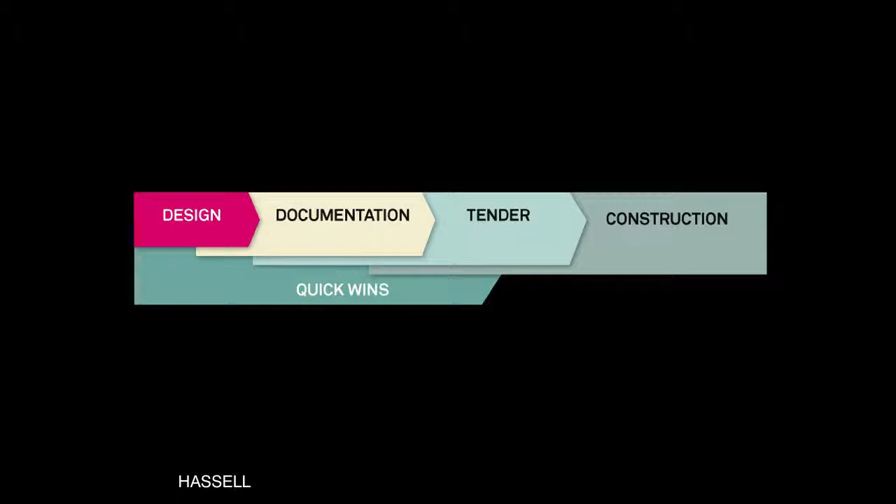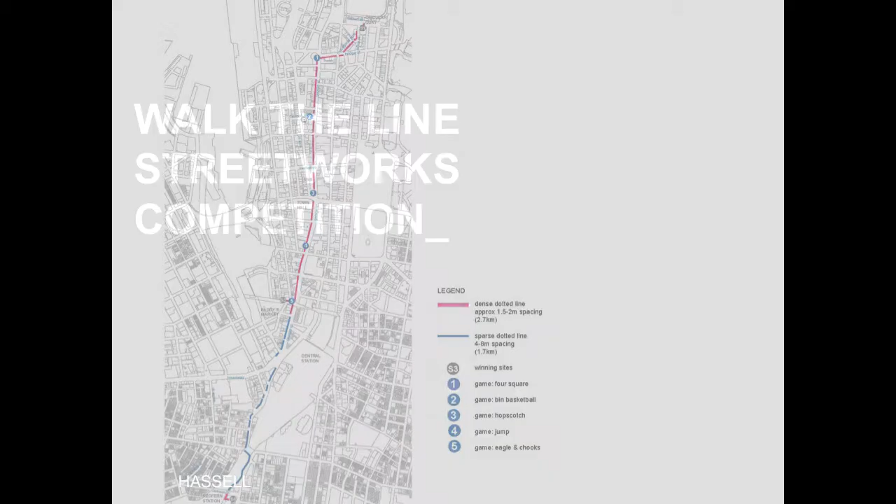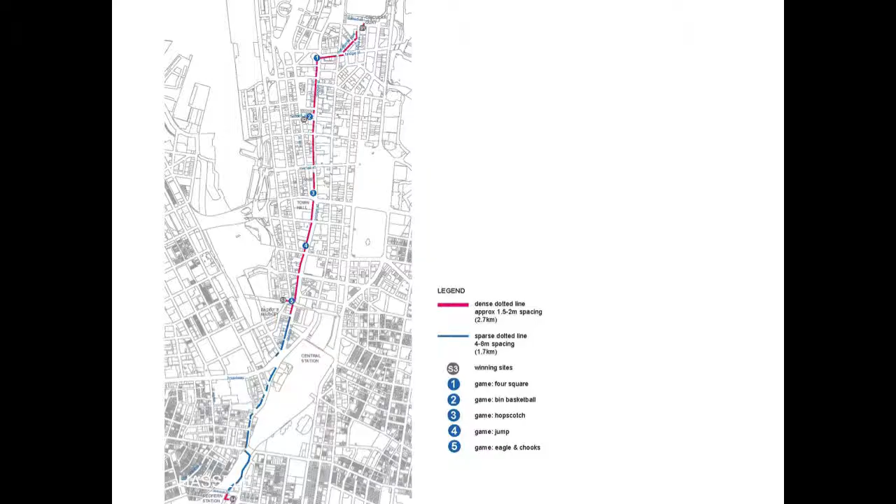One of the projects that falls into this temporary category is the Walk the Line Streetworks competition that we participated in and won last year. The idea of this project was simply to link, it was run by the New South Wales chapter of AILA, and they presented 5 different sites, and you could insert a temporary use or a temporary proposal in the project in any of the sites. What we did was link all 5 sites, basically with very little material, very small intervention. It was basically a pathway marked by a series of pink dots, but it was punctuated at each of the sites with opportunities for play, going back to the idea of what used to happen in streets.

And of course we're talking about city streets here, very different to a residential community. So it was also a bit of fun, but it was pointed in a way, trying to get people to think about what used to happen on the streets before the age of the iPod. And obviously lots of fun, four square, this, an opportunity to piff your rubbish into the bin from the gold circle. So that was one very, very low intervention project. We basically stuck stickers on the ground and then scraped them up again after the project was over.

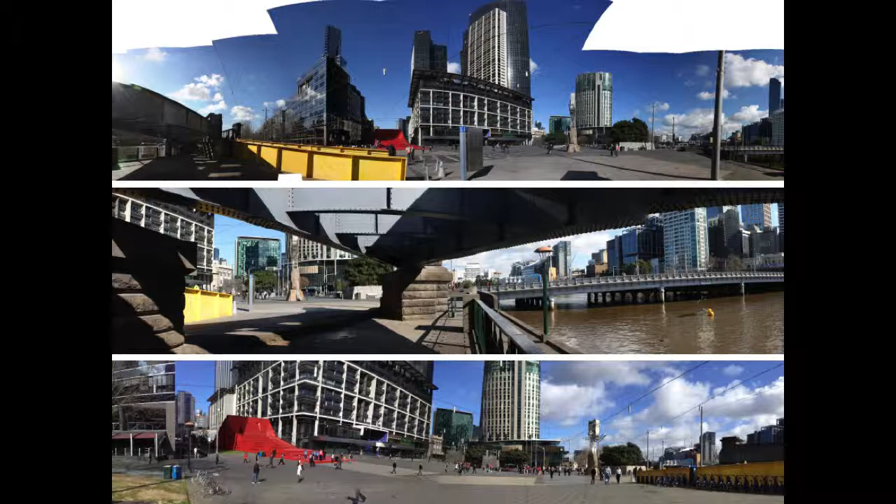We've also recently considered the Urban Coffee Farm as part of the Melbourne Food and Wine Festival. This was a much larger proposition, it went for 17 days. The site is, you can see the little red dot, approximately the middle of the site there - Queensbridge Square in Melbourne, on South Bank Boulevard, just where the Sandridge Bridge hits the square. Although it's called a square, it doesn't really have much of a life of its own. It's kind of ill-defined. It is at the end of that pedestrian link on the bridge, but it's a pretty lifeless square. You can see the yellow handrail coming down off the bridge, and there is a very large kind of lightweight stair structure, the red structure, over a car park entry.

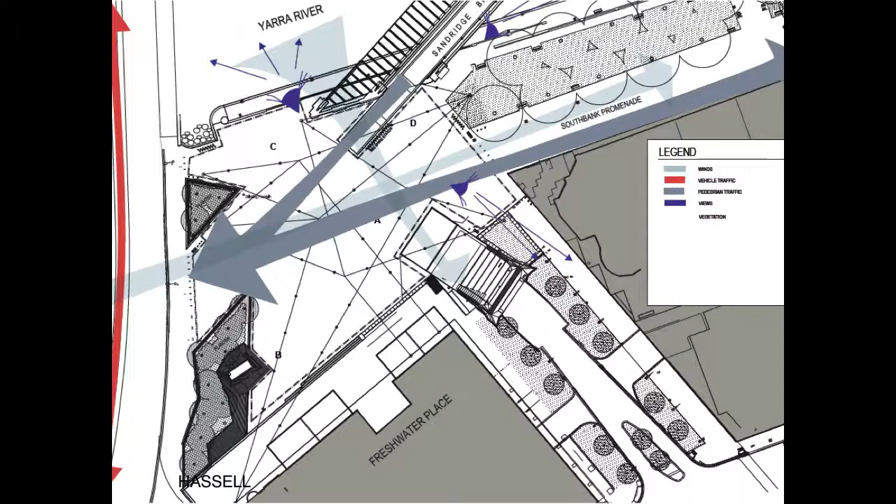The interesting thing about this place is that those grey arrows represent footfall of 50,000 people a day walking through that space, and I'd suggest that very, very few of those people stop. So this was about working with the Melbourne Food and Wine, who had a theme about coffee. They wanted us to come up with a temporary cafe. And we went and spoke with providers of coffee, Ben from Five Senses sources ethically sourced coffee from Guatemala, and we learned a lot about coffee and thought, in fact, that's what this space should be about.

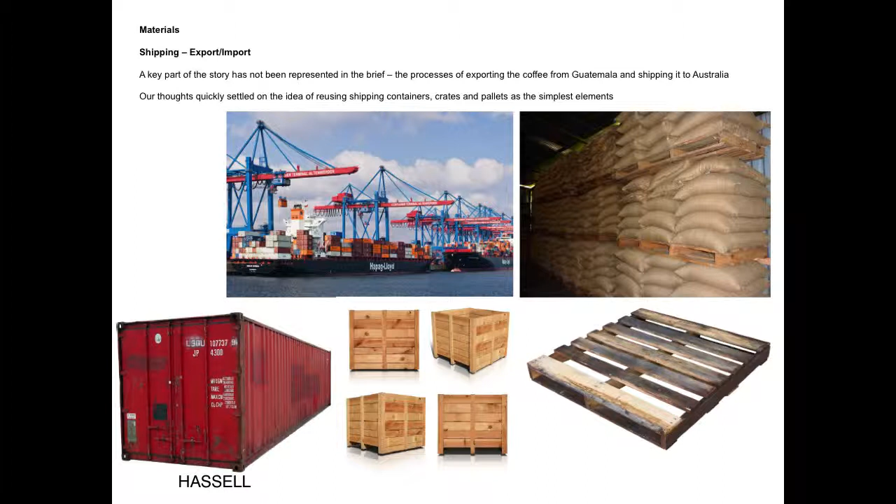So as well as play, we thought that public spaces and street spaces can also be about learning. What we hoped to do via the coffee farm was to help people understand where in fact their coffee comes from. People are really interested in provenance and the food miles involved in producing food. So there was an opportunity to create a farm with an education zone and a tasting area, but also to draw people's attention to the enormous amount of logistics it takes to actually move the beans to Melbourne, roast them, grind them before you get your latte.

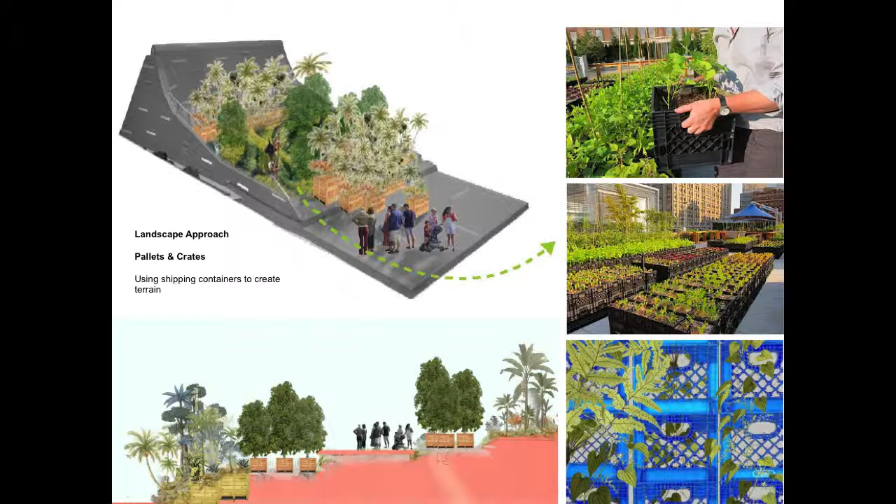The concept of using crates and containers has been done a million times, but for us it was an important way to draw that connection with the logistics. So here's the concept. The idea was about bringing a little bit of the jungle, that still somewhat mysterious place that your coffee comes from, to the city, and using the red stair to evoke the terrain of the terraced coffee farm, bringing it to Melbourne, so you can see literally the connection we're making. And we talked about the image on the right being a takeaway jungle.

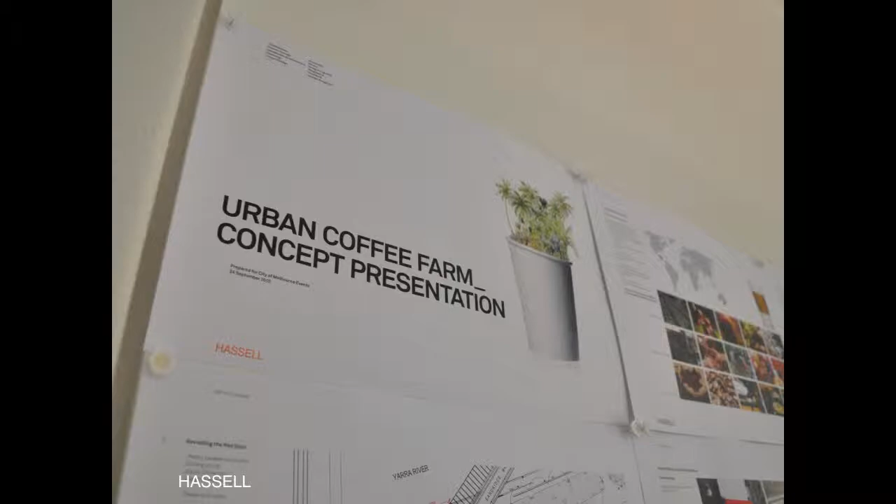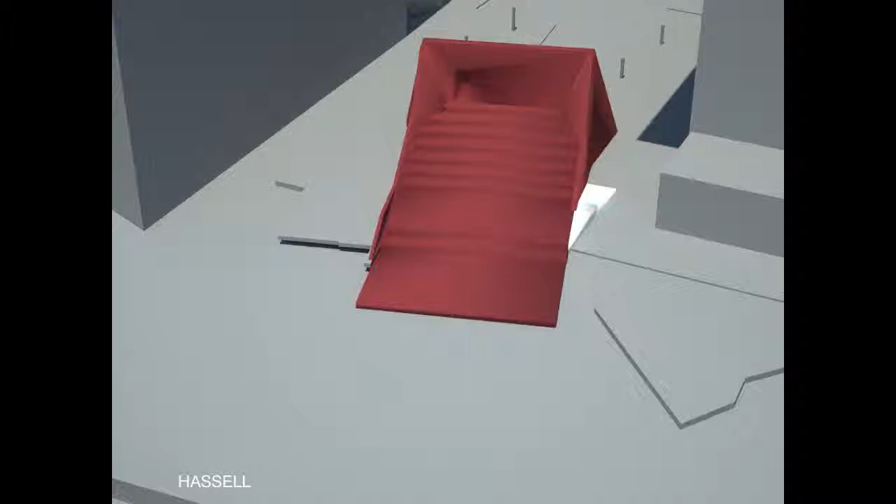Our young designers workshopped a number of ideas and then developed this one that we went forward with, and that was the original concept: how we could use the materials involved in the logistics of moving coffee around the world to actually create a terrain and occupy that red stair. And we went through all the process of sourcing the pallets and building up the concept.

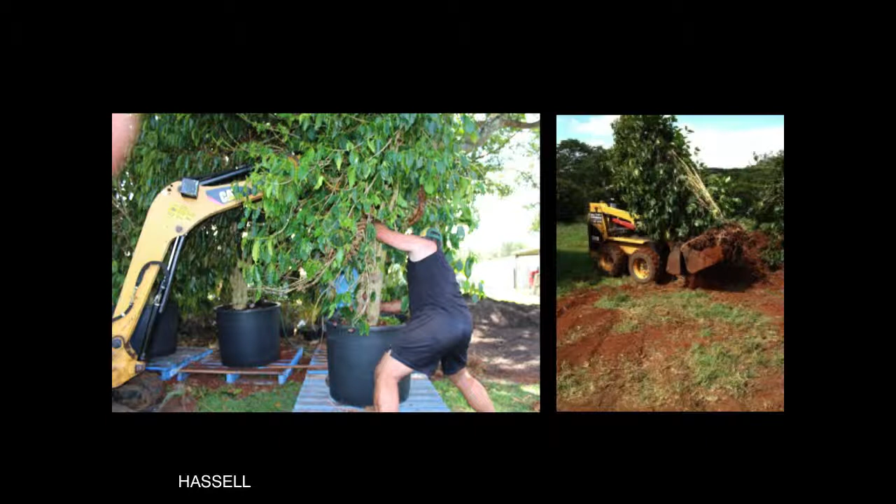We sourced some established coffee trees from a farm in Queensland that had actually gone out of business, and got some contributions from Warner's Nursery and other partners. It was a really successful installation for the duration of the festival. You can see we very cleverly borrowed the landscape of the plane trees behind, and we think we really managed to evoke that. Coffee trees always grow under a protective canopy, and we really wanted to evoke that kind of hillside.

So that space, talking about learning, the space in the back there was usually full of people tasting different coffees, brewed in different ways, roasted in different ways. So it was quite a learning environment. It was a lot of fun. We got a lot of media coverage and a lot of blogging happened from there.

Interestingly, the program over 17 days featured, because it was part of the Melbourne Food and Wine Festival, some fantastic Melbourne cafes and restaurants. We thought this was a really good way of getting the community involved. Projects like this are often criticised, I think, because permanent cafe owners are concerned about trade taken away from them. But this is a way that existing businesses can be showcased.

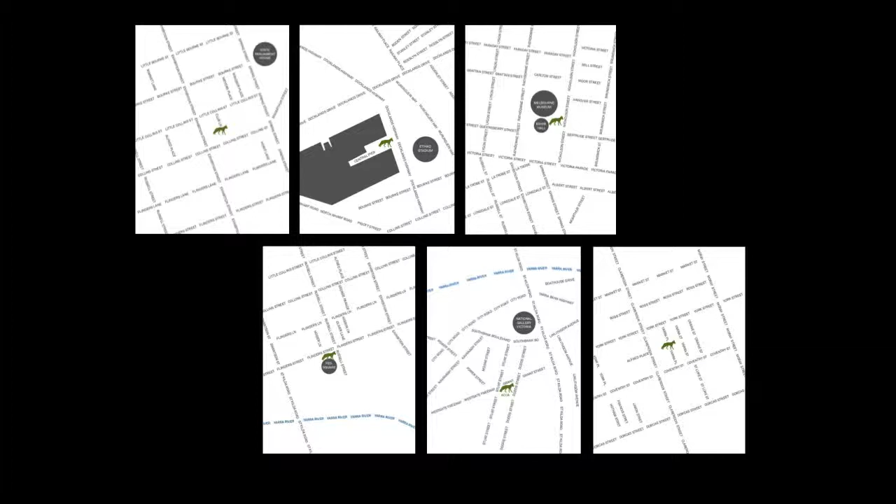Chasing Kitsune was another temporary project that we worked on. Kitsune is a mythical Japanese fox, and no one knows where he's going to be tomorrow, no one knows where he was last night and where he's going to be tomorrow. This project moved around the city, and the only way you could find out where it was is by following on Twitter or Facebook. So you only ever found out a couple of hours beforehand where it was going to be.

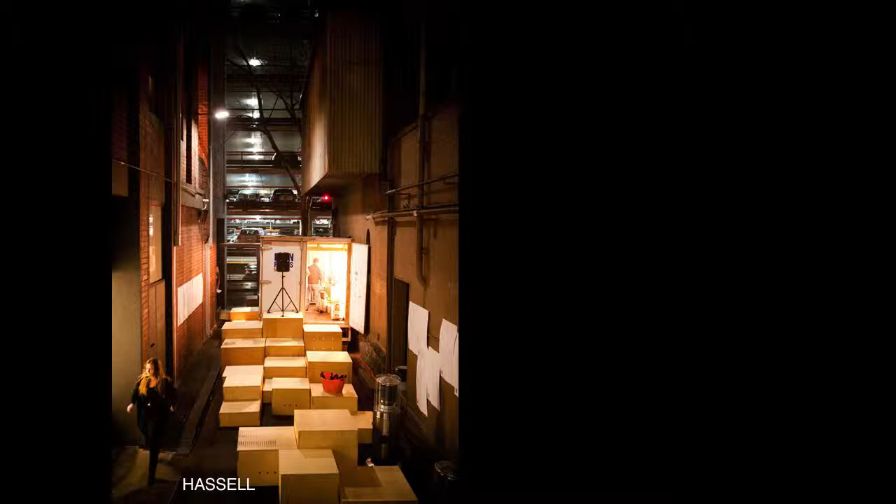The experimental part of this project was this movable landscape that in each different location looked different, because it had to be configured in different ways because of the environment. So that was another really interesting temporary project.

Moving on from the temporary projects to permanent projects. This category talks about multi-mode, and by traditional, as I said before, I'm talking about splitting, not shared streets.

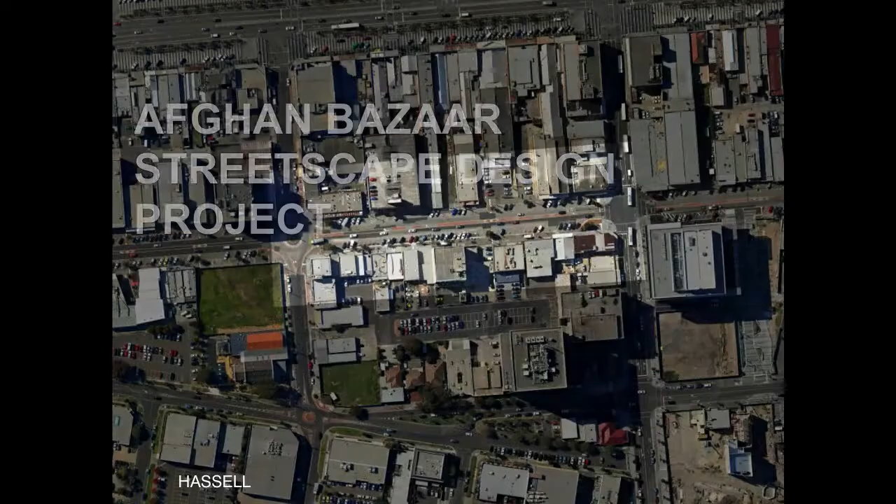The example we're using is the Afghan Bazaar Streetscape Design Project. The project is in Dandenong, an eastern suburb of Melbourne. It's an employment centre, but a centre that's been in decline for quite some time. There's Thomas Street there. Places Victoria ran a project over some years revitalising Dandenong, and there was a lot of good work that came out of that.

Lonsdale Street upgrade and some master plans for various precincts. The idea for the Afghan Bazaar came out of that work. There was some signage done. Thomas Street was identified as the centre of the Afghan community. In fact, I think it's 40% of Victoria's Afghan community, maybe Australia's Afghan community, lives in Dandenong. This LGA certainly represents the highest proportion of Afghani people.

So the first project that came out of Places Victoria's work here was a signage project marking this as the Afghan Bazaar. Unfortunately, they got it wrong because camels were used as symbols on the project. For anyone that knows anything about the Afghan community, the camel is a very clear representation of the Pashtuns, who dominate the other communities or sub-communities, and it was a very, very contentious thing to do. It upset a lot of people.

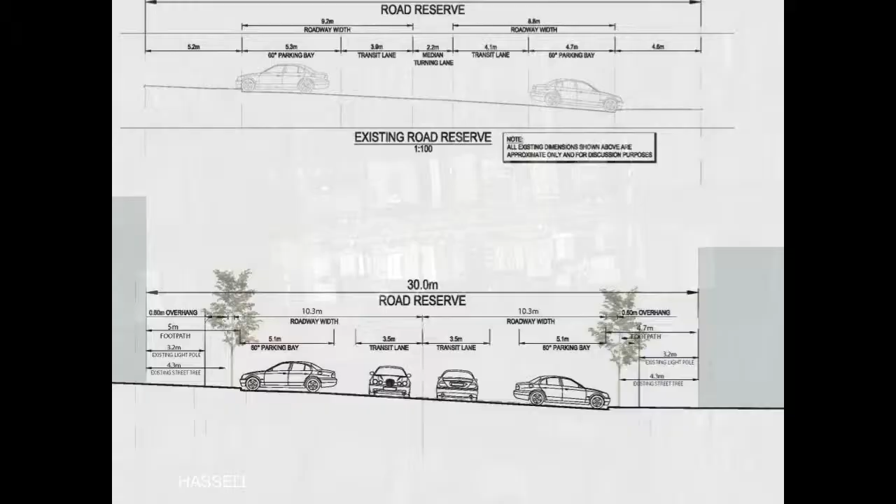You'll see in some of the images what they were. It's just a really simple cross-section through a typical street with footpaths separated from the carriageway with parking zones, and we reduced the number of parking spaces, but I'll go through that.

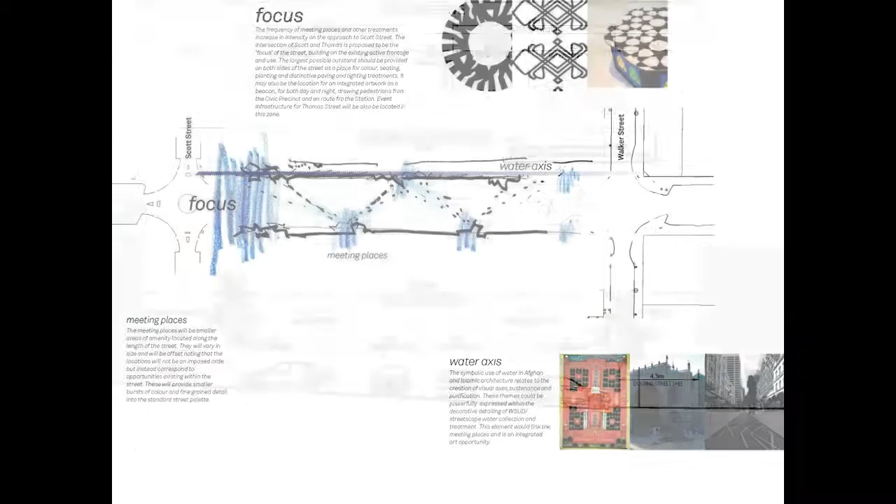So the project provided a focus for the precinct. You can see in the sketch design that was to mark, do what the signage with the camels was trying to do, mark that entry into the precinct, but provide a visual focus.

Thinking about what the subsets of the community had in common, there was a lot of talk about the importance of the blue mosque in Afghanistan, the colour blue itself, red and blue from Afghani rugs, the idea of creating meeting places, and meeting places that were particularly good for large groups, family groups, and after dark.

There's a very large part of community activity in the Afghani community that happens after dark. Family groups go out as an outing and sit in groups in the street. That's how those streets are used in Afghanistan and throughout the Middle East, and that's how the community wanted to keep using it. So we've gone through play and learning, and now we're up to talking about meeting and family groups meeting and occupying the street.

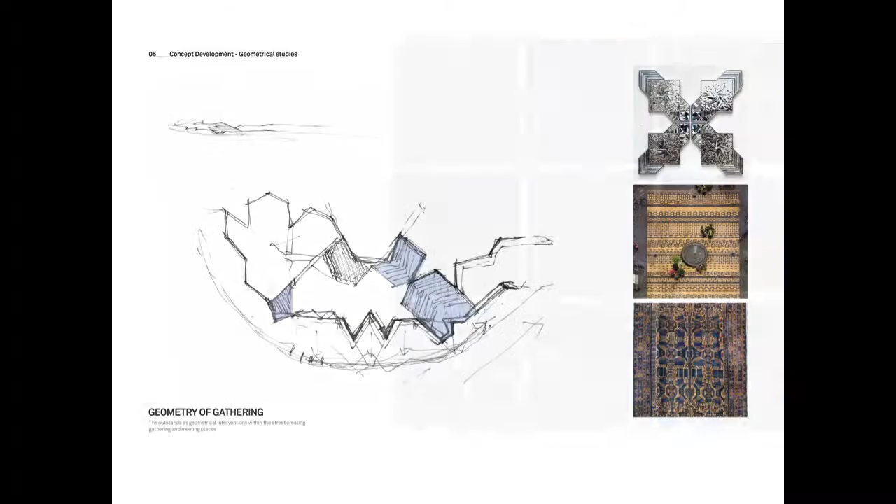Water axis was also a very important component, but we picked that up using blue as a colour theme throughout the project. You can see all sorts of references in the Middle Eastern use of blue. Another consistent theme was in the art, particularly religious motifs, the use of Islamic patterning, which we reinterpreted and reapplied in different ways in the furniture and paving through the project.

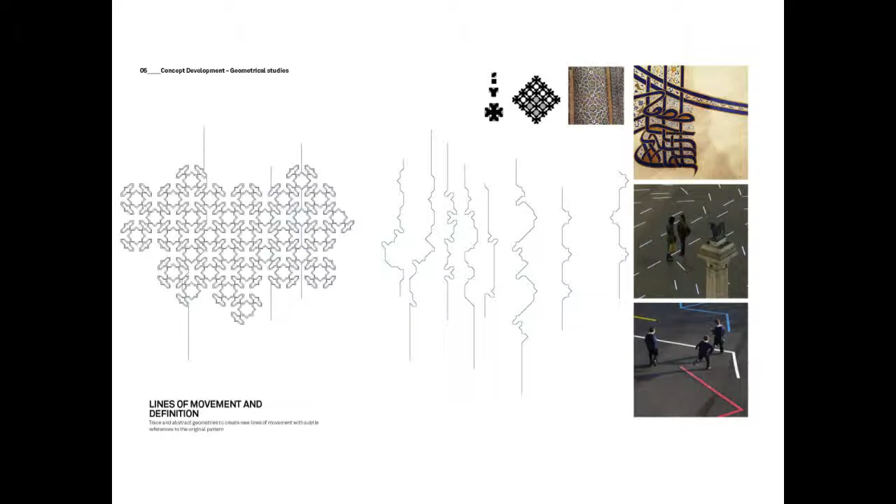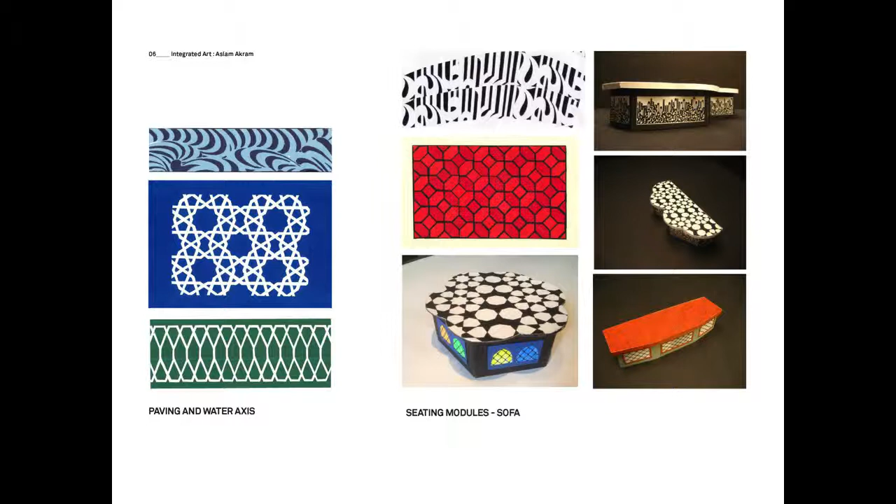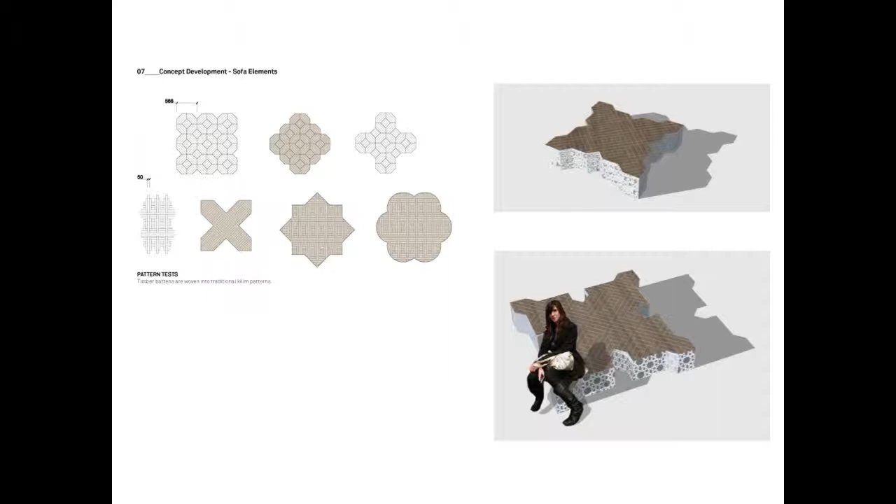Some of these slides are reference images showing how we built up the ideas. One idea we explored was a sofa as a seating module, in direct response to how that community occupies space traditionally. We reinterpreted and redesigned it using the motif of Islamic geometries, applying it to a new piece of furniture. This slide shows on the top left a detail of how we resolved some focal points, introducing at certain locations a detailed patterning of paving that evoked traditional carpets and floor treatments in Islamic tradition.

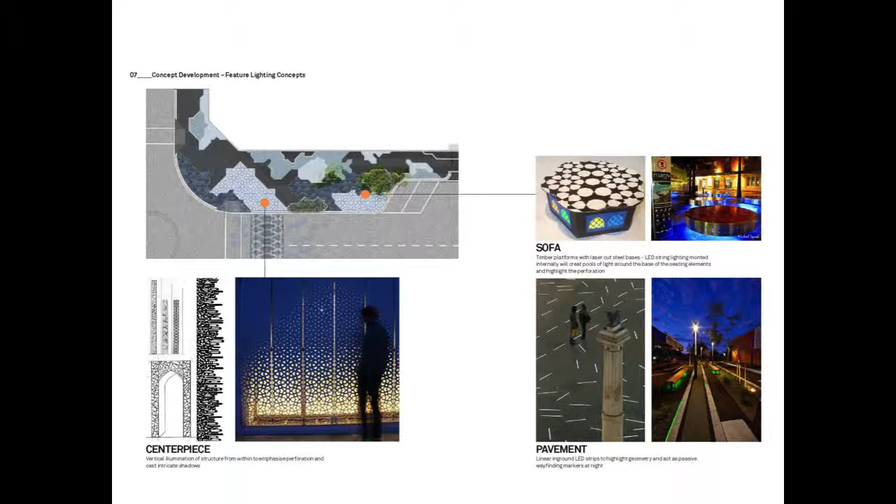One point I didn't make is that the treatment isn't consistent, because we enlarged the footpath as much as we could, but rather than treating it the same way all along, we really provided focal points and meeting places. You can see that diagonal setup we've created for that visual connection between those meeting places.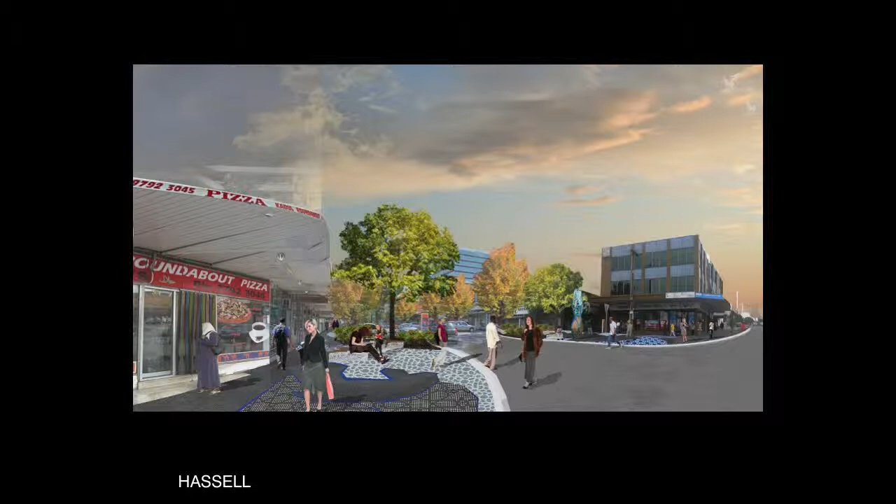We also worked with a local Afghani artist who has done some wonderful things around Melbourne. He's made a beautiful Afghani tea bicycle that goes around Dandenong and other festivals in Melbourne. He worked with us on this lighting feature, which incorporates a lot of the Islamic geometries and also the mosaic tiles you can see in the base. That's a light totem he worked on with us. And here's a visualisation of that corner - you can see the lantern incorporated into that focal point.

So the kind of activities we're talking about in that project, to answer what happens on the street, isn't foreign to what the general Australian community does on the street, but the resolution of the detail is quite specific to the community we were designing for.

Very successful project - all those Afghani traders signed up for a reduction in car parking, which is always the challenge on these streetscape projects. It's very difficult to convince people that they do want enlarged footpaths and street trees, and that they'll have to give something up spatially. It's especially hard to convince shopkeepers to give up a parking spot in front of their shop. But we had great success with that one.

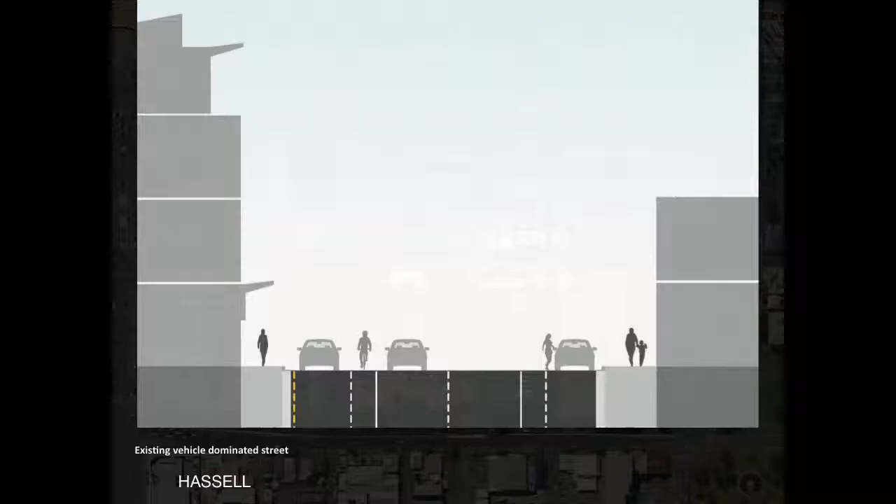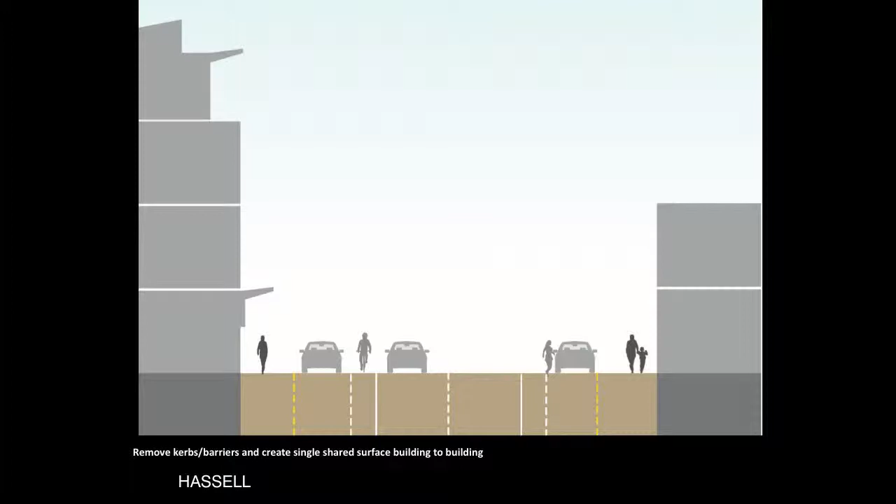As a simple diagram, this is what exists right now - the street is dominated by vehicles, with narrow footpaths to the side. Our idea was pretty simple: remove the curbs and barriers and create a single shared surface from building to building, so that rather than feeling like a link, that zone starts to feel like a place. We're trying, at the starting point, to link it with materials so it just looks like the one place.

The other things we did in terms of safety was to reduce pedestrian crossing distance, to encourage a low speed car environment, to improve pedestrian and road user legibility, and of particular importance when you've got a shared street, you have to give signals to drivers that they're entering a shared street environment and really their speed needs to be slower. And encourage greater on-street activation and precinct management. So that last one went beyond the physical part of our project and really starts to step into the management and the involvement of the community in the ongoing success of the street.

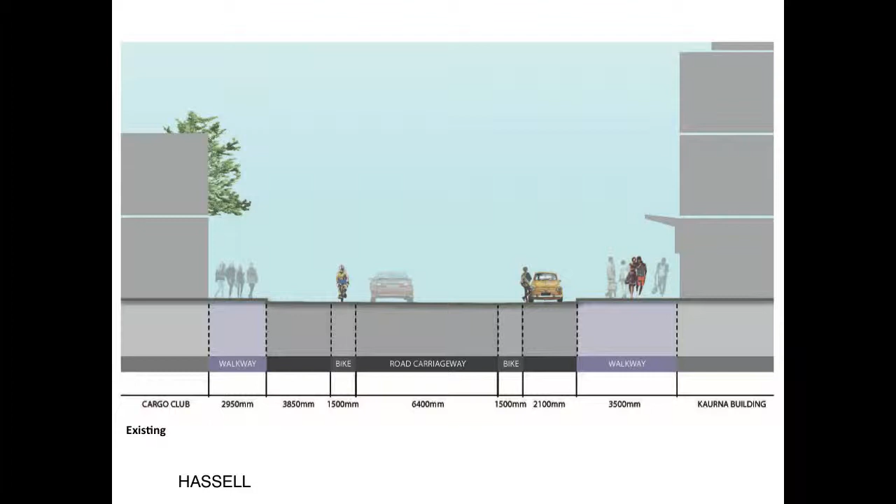So this is the section as it exists now, pretty simple, pretty typical. And our proposed section is captured in this diagram here. You can see the up and down of all the grading. Of course we wanted a much simpler solution, but there were challenges with maintaining cover on existing services that couldn't be moved — all those challenges of working in an urban environment. And if you look really closely, that central drain on the footpath is in fact not central, and it's not exactly the same as the other side, but it was all just trying to move around all the constraints we had going on underneath the ground.

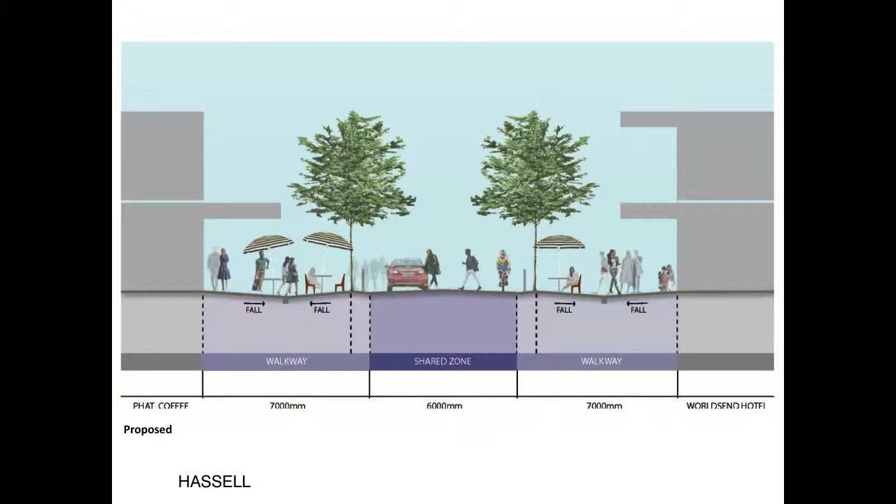Which led us to the completed design, which shows a first for Adelaide: some zebra crossings, which are normal in Melbourne but don't occur in Adelaide. Do you have them in Hobart? No. Well, now Adelaide's got them too as a result of this project, and we went through a very rigorous and time-consuming negotiation with the Department of Transport and Infrastructure in Adelaide, who were partners on this project and supported this solution. We even got away with not having the flashing yellow lights at the zebra crossings.

And the way we've managed to do that is by having very carefully designed orientation zones at both ends, where vehicles are squeezed into the centre of the road. A median is introduced as a visual cue, and bikes and vehicles have to use that same carriageway at those orientation zones. So we've got bike lanes ending and merging with traffic, with bikes taking precedence over vehicles, and that will be handled partly by signage, but also by changing materials on the road surface to slow vehicles down. So that condition exists in that shared zone in the middle.

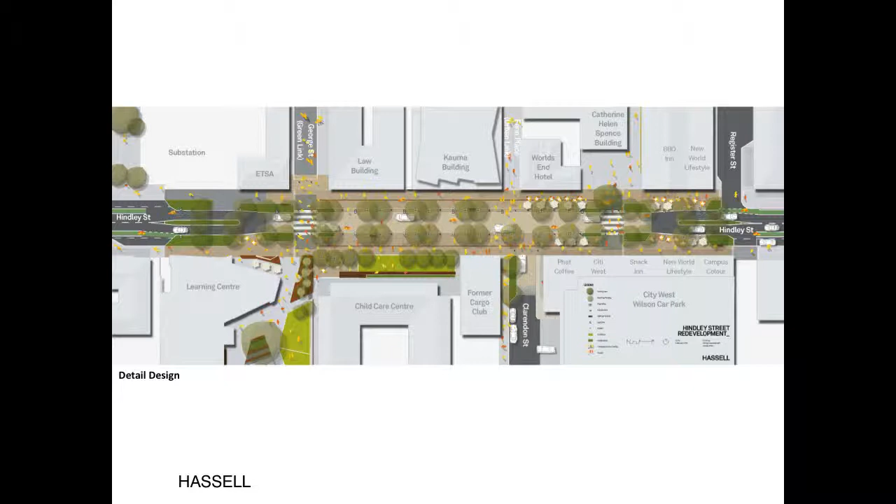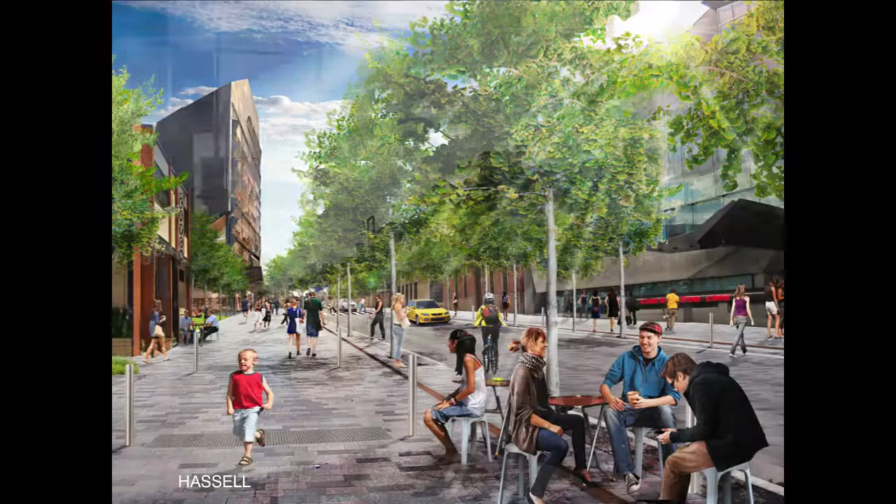So some before and after shots. This project is now in construction. You can see there a new building, a university building — that's a HASSELL and John Wardle project. But this is the proposed view from that same place. We're extending that paving and really connecting it across the entire zone from building to building.

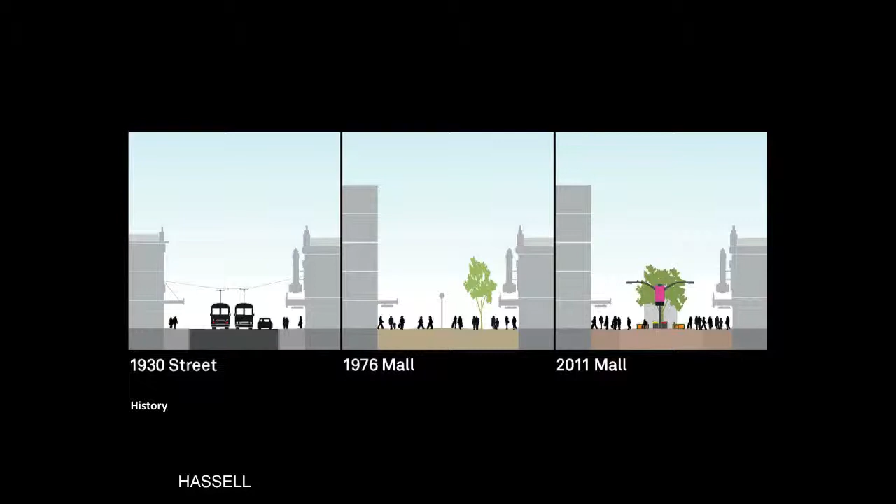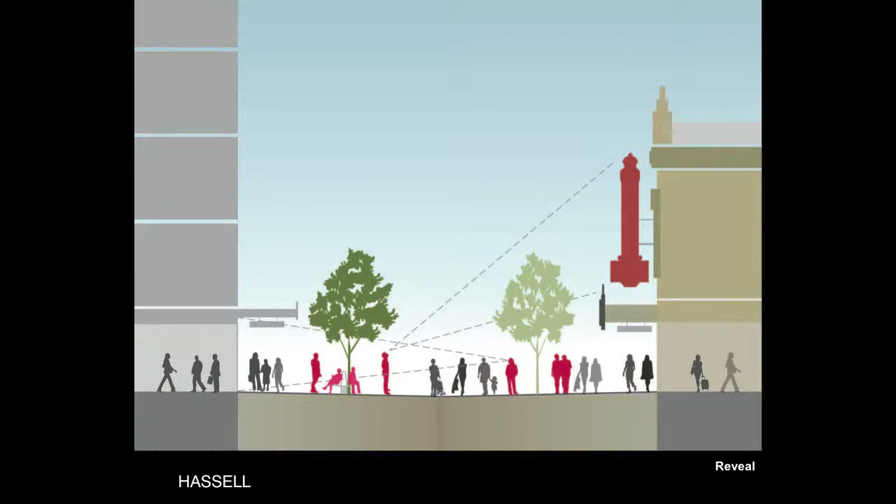So that's the existing, that's a zoom of the existing. Our concept was to reveal the good stuff that is in Rundle Mall. So the first move was really to convince the client that they had to remove quite a bit — had to remove those central restaurants blocking views along the mall, had to remove the central lighting. And there's quite a number of fantastic buildings along the mall that we wanted to draw attention to with lighting, but also just by removing some paraphernalia in front of it. Just reveal what you've actually got to start with as the first step, and then enable a whole lot of things to happen in the mall, but not prescribe them.

We intend for people to walk up against the shop fronts themselves, but mainly in the centre it becomes a space that is about people. We've described those pink zones in the diagram as enabling zones - that's where you can sit, where we've got plug and play temporary uses, with power and water at various locations. Different carts and temporary uses can be brought in. So we've narrowed down those enabling zones, and that's where you'll find all the bins, bike racks, trees, seats, etc.

We've really thought about how to extend the attractiveness of the mall into the night time. It's a very popular place during the daytime, but very little activity during the night. So we've been working with the Rundle Mall Traders Association to make that happen as well - simple things like extending some trading hours, and that's already started to happen.

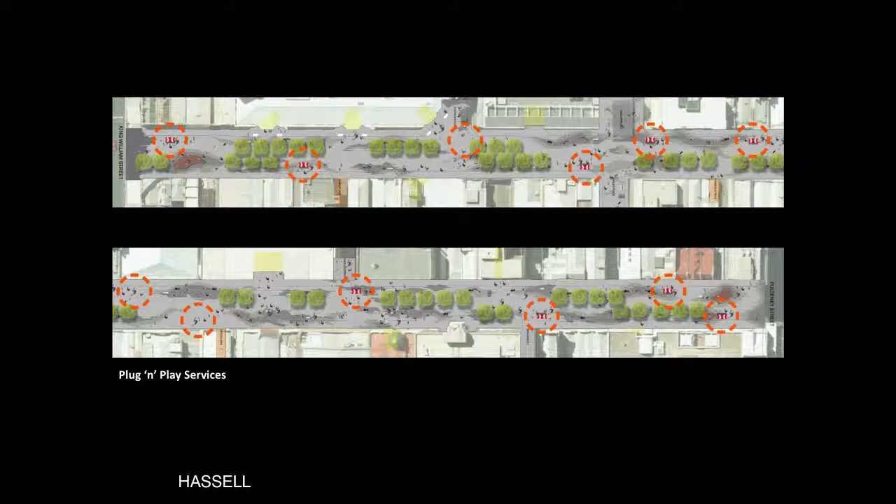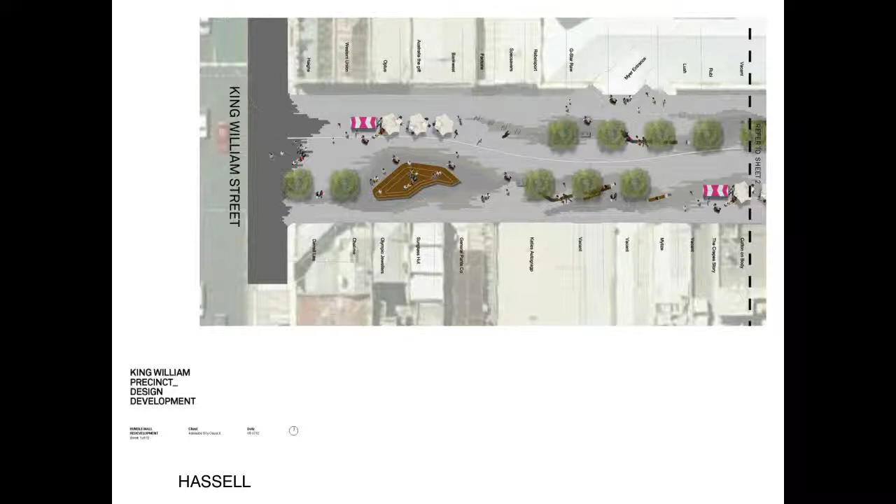This diagram shows the location of what we call plug and play - simply power and water provided to those temporary uses, and details quite a rich, non-directional kind of design. It really just is a textured floor, a ground plane that implies intensity of uses. You can see those platforms - that platform at the intersection of King William is a gathering place, with clusters of trees and seating, reinforced by the intensification of paving underneath it.

I won't dwell on that - details of the furniture. We've got a small amount of time left. There's an image of one of the renders at the end, and our before and after shots.

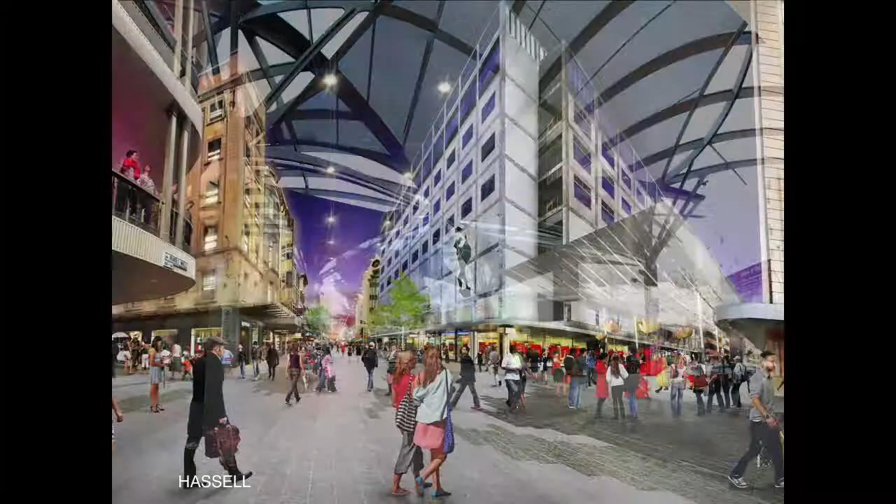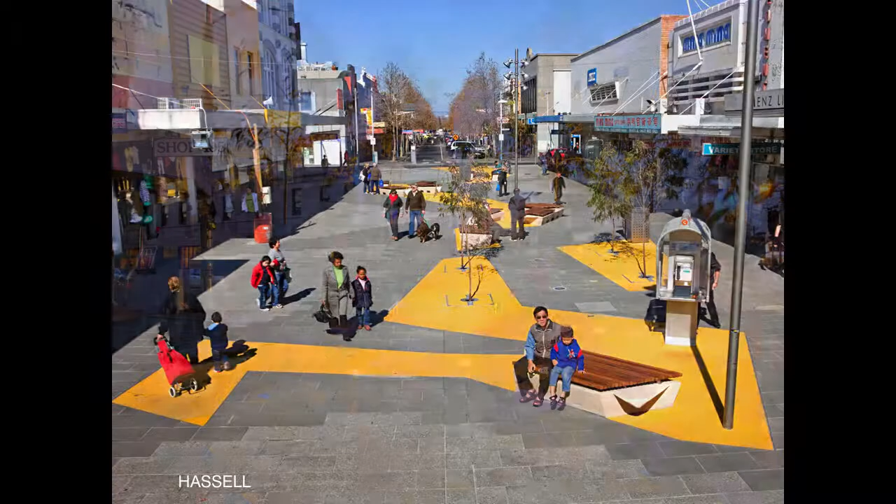I won't spend too much time on this one. This is another pedestrianised mall example, this time in Melbourne - the Nicholson Street Mall example. It was a great finished product, but the problem with this project was that ongoing management of the space just didn't support the vibrancy of the environment, and we learned a lot out of that project. The finished product was a good one, but what really matters is what people are doing in the street, so activities. I put that in as a project that we learnt a lot on, and it wasn't our most successful.

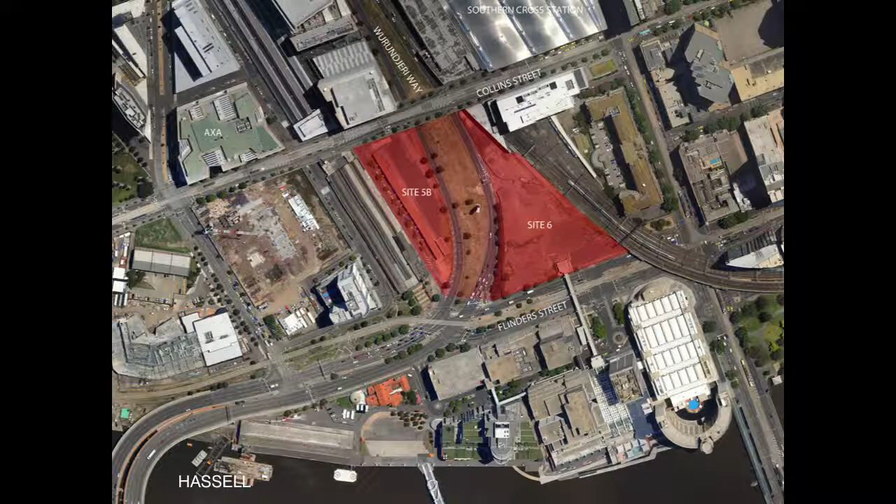The last category, and then I'll wrap up, was thinking about new streets in completely new precincts or new communities. The title I've used is New Streets, Old Typologies. Batman Hill was a project, a competition - we worked with Mark and the rest of the team at McGregor Coxall in Melbourne. That's the site there, shown in red. It's on the western edge of the expanding CBD, and it really links the traditional CBD with the Docklands area - it's one of the sites that does so.